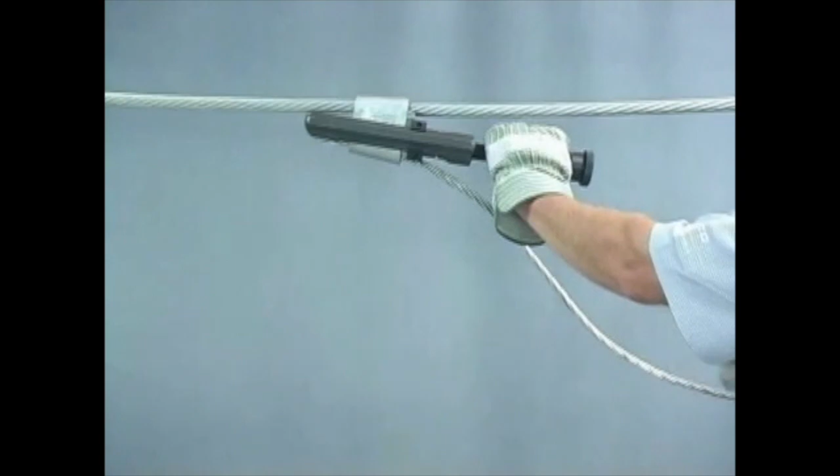I've seen a fair bit of change within the industry, and a lot of younger apprentices and linemen on the job. The one thing I notice with the younger guys is that they're being taught safety first. Not so much like that when I started out.

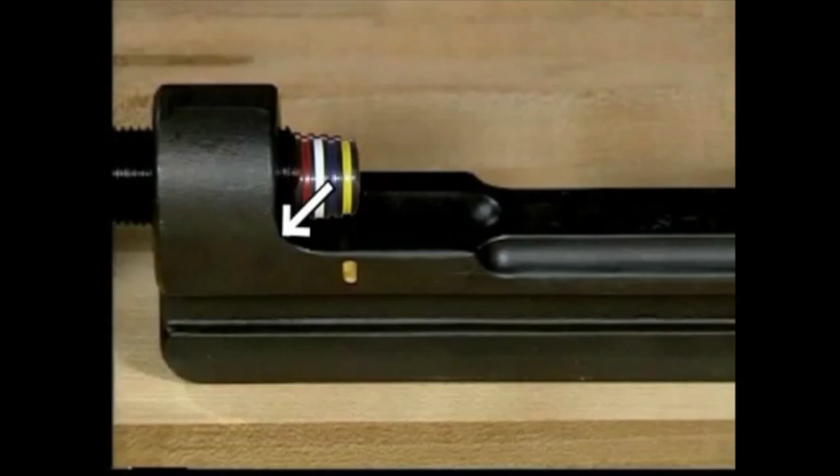I was recently on the job with an apprentice who was using the Ampact gun for the first time. He didn't have a clue, hadn't had any training, and didn't appreciate that he was working with a loaded gun. I stepped in to give him some pointers before he injured himself or other workers around him, thinking, if this was my kid, I'd hope that someone with more experience would do the same.

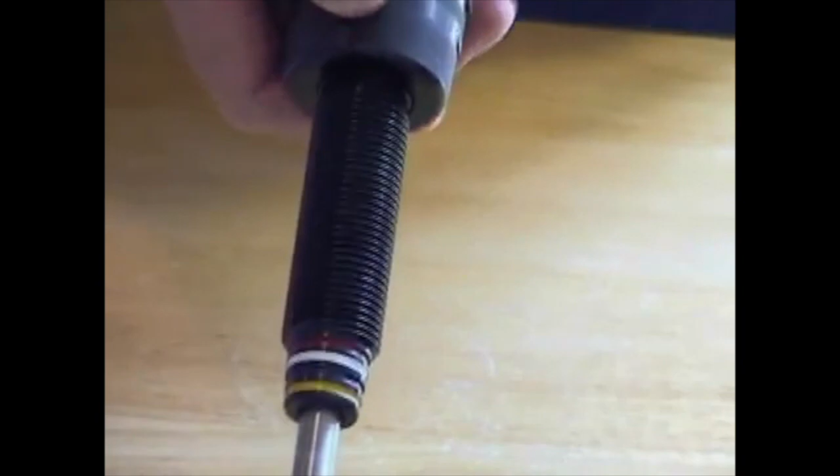I had an Ampact manual in the back of the truck, a little worn, but I figured it'd do the job. It wasn't until I walked him through the steps that I realized not only how much there is to learn, but how many safety concerns there are around this tool.

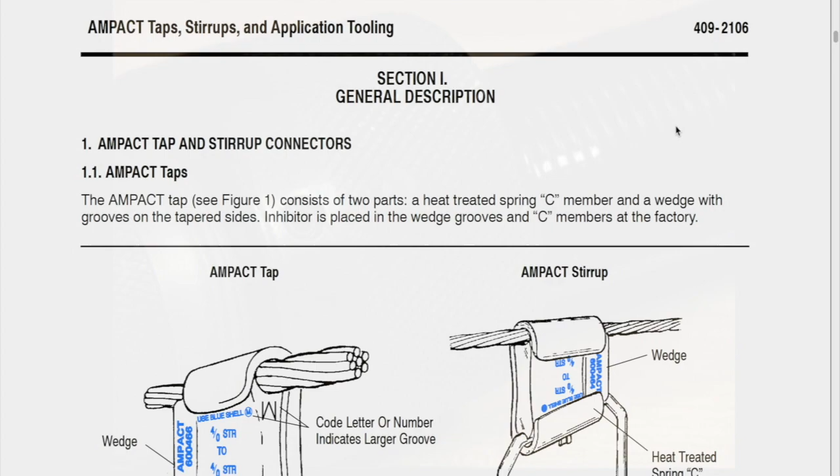Take a look at this manual. There are 42 pages that you absolutely must know to use this tool. I was a bit surprised when I realized how many times the word danger came up. There are 38 instances of the word danger associated with this tool.

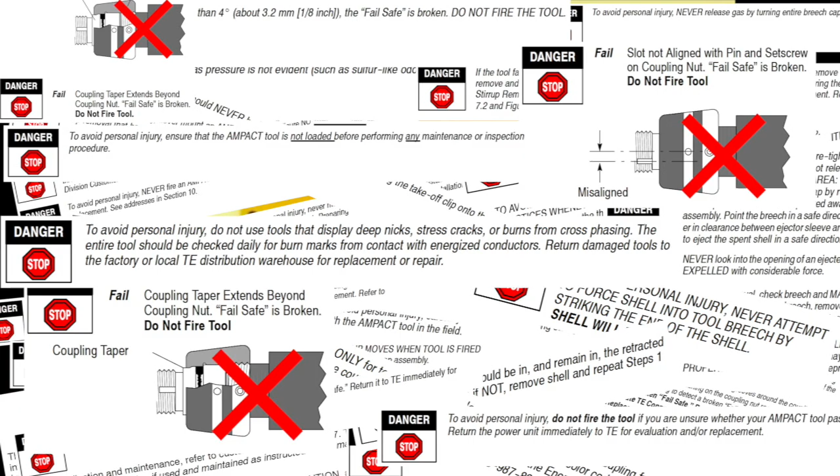Look here. This is the published meaning of the words danger and warning. Danger indicates an immediate hazardous situation which, if not avoided, will result in death or serious injury. Warning indicates a potentially hazardous situation which, if not avoided, could result in death or serious injury.

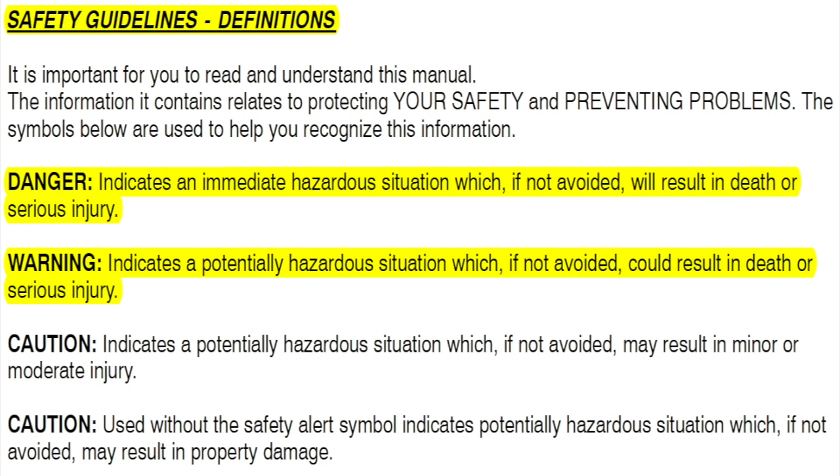Are you kidding me? Why are we still using a tool that right in its manual you're warned at least 28 times that you could lose a limb or be killed? Why, when there are other non-black powder options out there? We're dealing with black powder and the possibility of the breech cap blowing off.

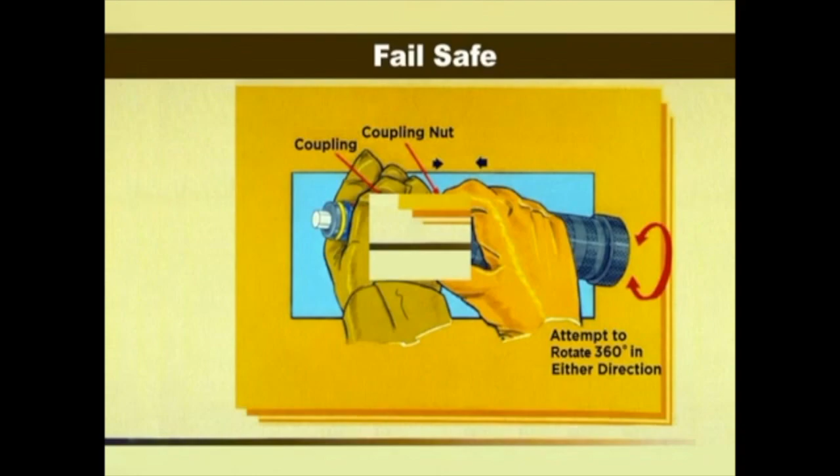By the way, there's a 25% misfire rate with this gun. We all know how much of a pain it is to change out a shell that misfired, especially if you're in tight.

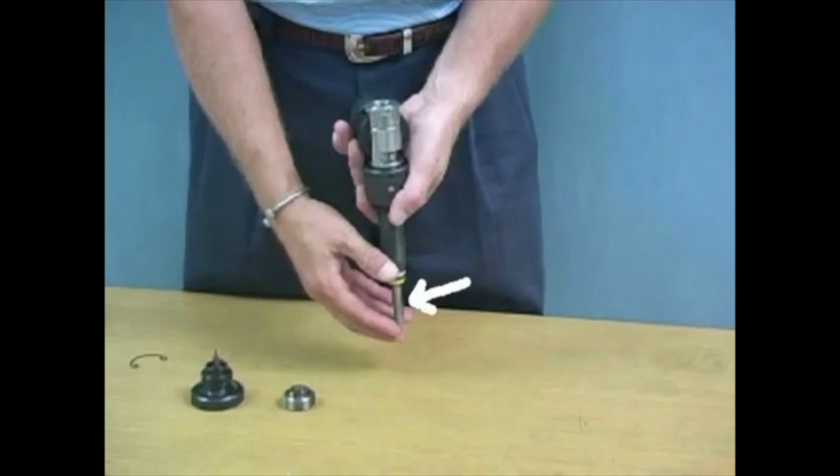There's also the issue of noise and possible hearing loss after years of use. We should be wearing hearing protection every time we fire this tool, as the manual states that up to 99 decibels are generated. OSHA states that 85 decibels is the maximum allowable exposure.

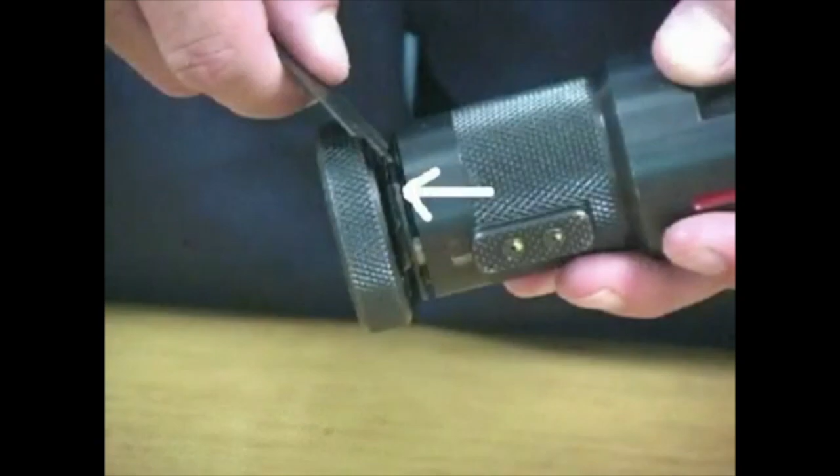Earmuffs always? Really? I've never seen anyone use the muffs when firing, and I don't think that I will, as it can cause other safety issues for us when we're operating the boom and communicating with other guys on our crew. Here's the bit on noise.

Striking the gas release knob with a hammer will cause a noise. There is additional noise generated by the expansion of gases when firing the shell. A typical hammer strike only will cause approximately 90 decibels short duration noise. The addition of the largest yellow shell will cause the noise to be approximately 91 to 99 decibels short duration noise.

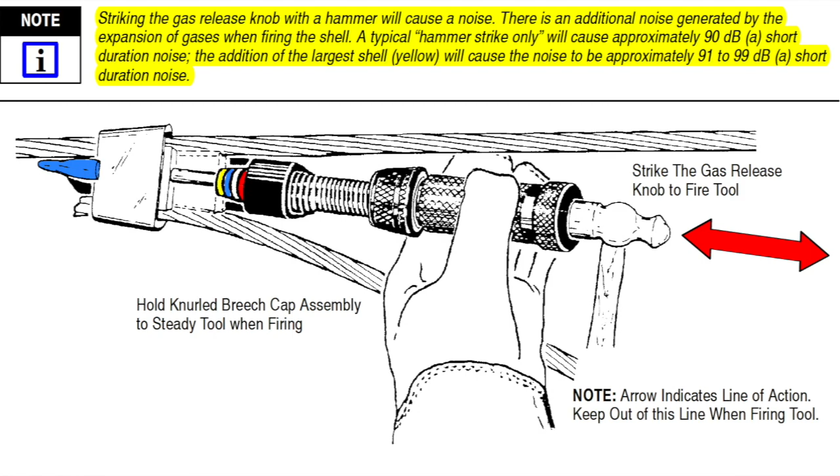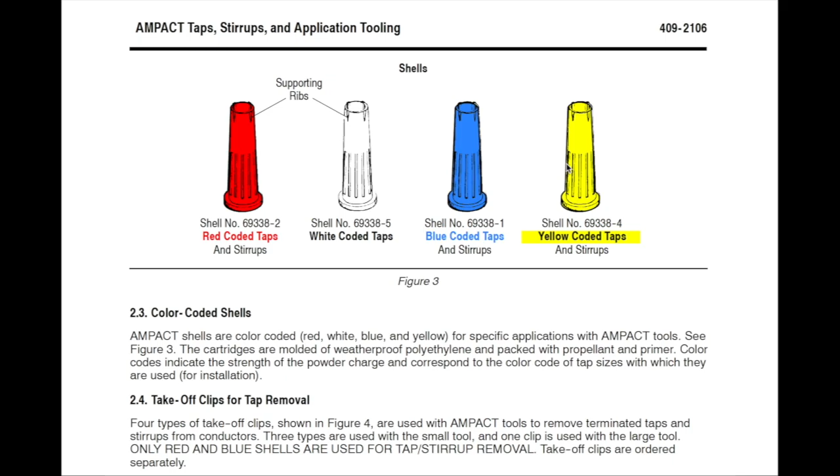Scan through these instructions. To start with, there are 4 different shells: red, white, blue, and yellow. Each color represents a different amount of charge. You need to ensure you use the right shell for the right connector.

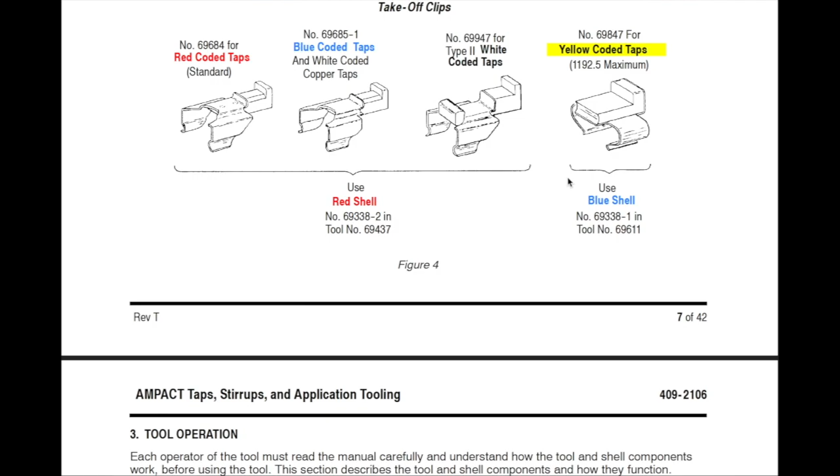There are 4 different removal clips to take off the tap: red, white, blue, and yellow. You must use a different shell to remove the Ampact than you did to install. There are 4 different possible settings on the gun that you have to ensure you achieve before actuating.

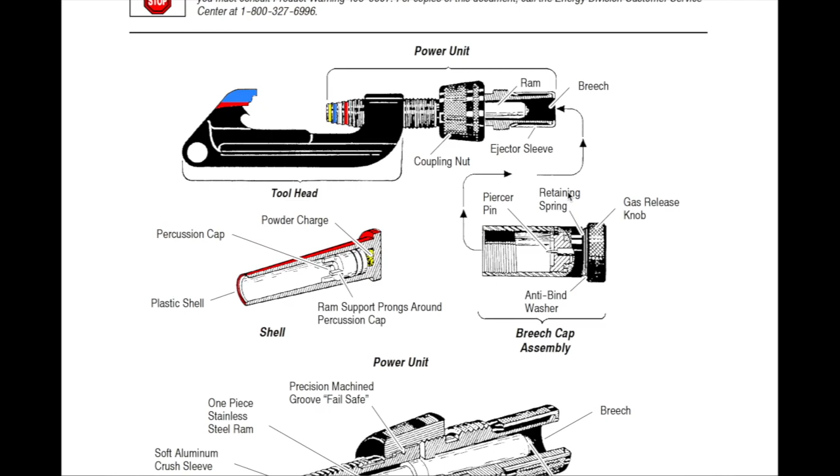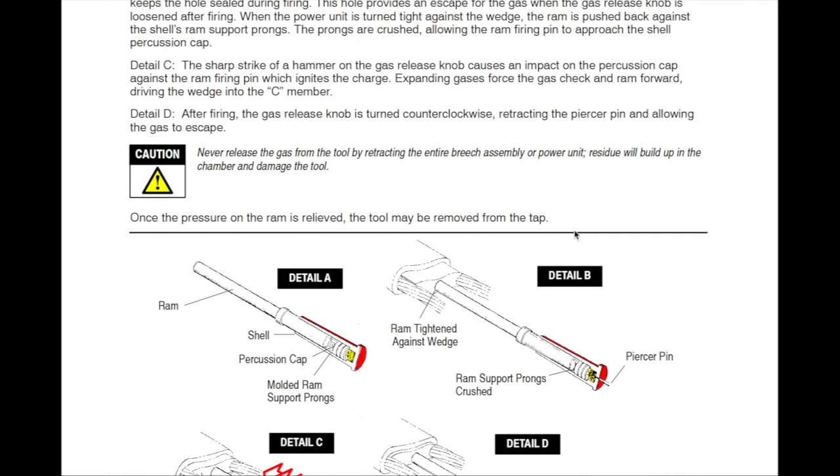The consistency of the connection is dependent on the alignment of the color coding. If not aligned, you could have an improper connection. There are instructions on what to do when the shells jam, how to inspect crush rings, and what to do in ram damage scenarios, defective firing pins, and so on.

I'll put the manual away for now. Check out this video I have running in the background. I've muted the sound. You can find it on YouTube by searching for TE Connectivity Ampact Easy Load Wedge Installation Tool Part 2 of 2.

Check out how complicated this thing is. I won't play the entire video, it's over 10 minutes long.

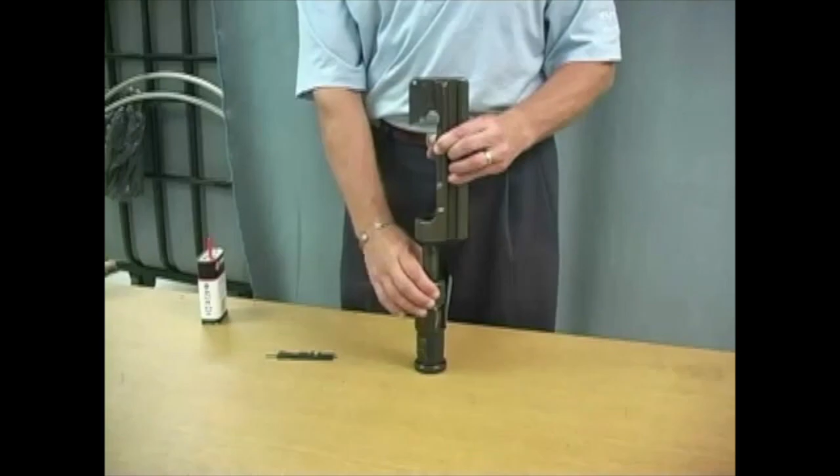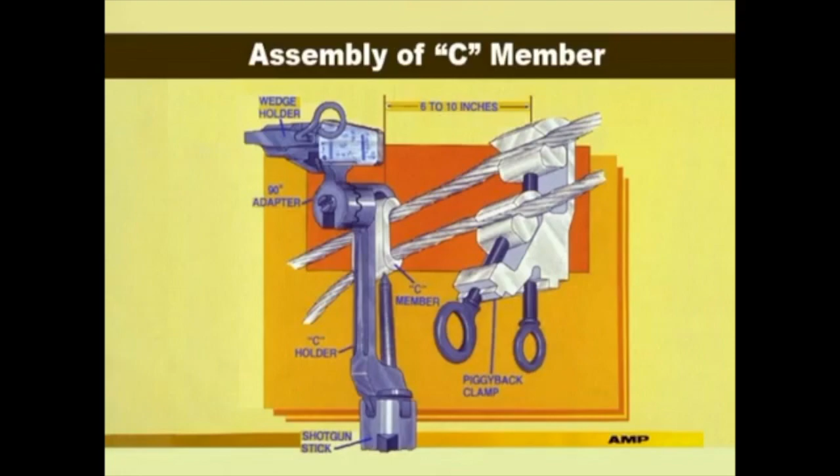To assemble the C-holder, install the 90-degree adapter to the wedge holder and attach it to the C-holder. Slip the C-member into the C-holder and tighten the eye bolt. Place the wide end of the wedge into the wedge holder with the wedge grooves oriented properly in relation to the through and tap wire. Tighten the wedge holder bolt.

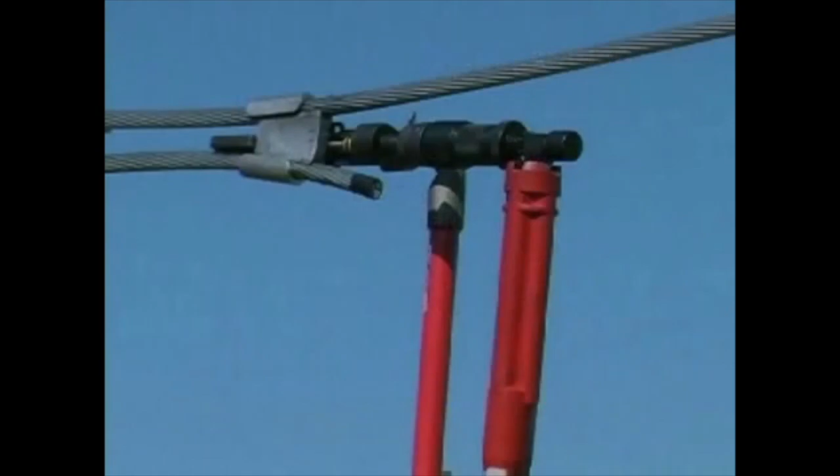So, to go back to the beginning, is there enough training offered to our apprentices on how to properly use this tool? I'm not aware of any formal training or even annual refresher training provided, and certainly no certification, no documentation for liability. Am I liable as a journeyman or foreman for my crew?

The manufacturer states this tool should be inspected daily, but as is the case with a lot of our other equipment and PPE, is there a maintenance program in place? Is it trackable with an audit trail? Who's inspecting these to ensure that they're safe to use?

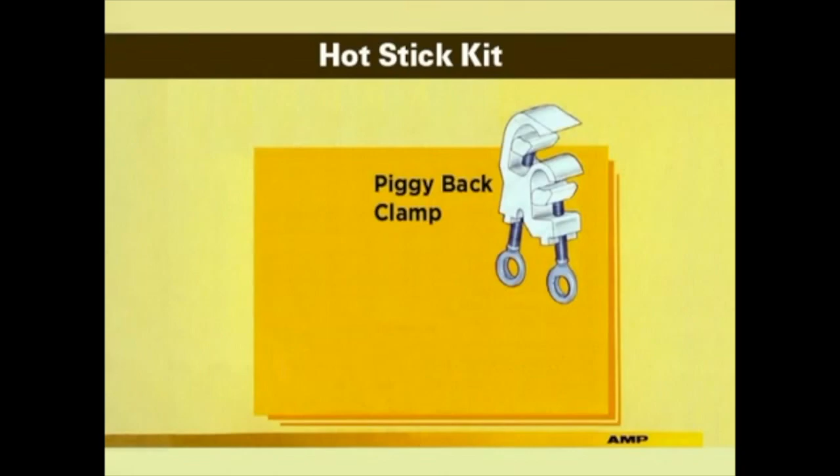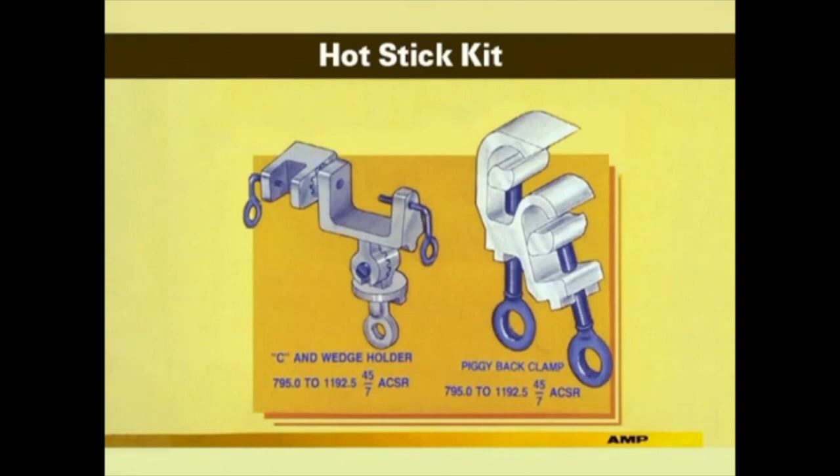What about the shells? Are they stored in explosive fireproof boxes when they're on the truck or in the warehouse? Are the workers in the warehouse handling these black powder charges trained to deal with explosives? I've seen skids of these shells. Boom! There is legislation around black powder storage, and as far as I know, no utilities are following these requirements.

What happens in a fire? Who's liable in this case? What's the due diligence here?

I have to wonder why the industry continues to support gunpowder. This tool came on the market 50 to 60 years ago when there was little focus on worker safety. Do you know that the tool has and continues to remain unchanged from the date it came on the market?

We've been moving away from the Ramset and Hilti pin firing guns and have gone to shields, anchors, and epoxy type pins. So why are we still using a powder actuated tool?

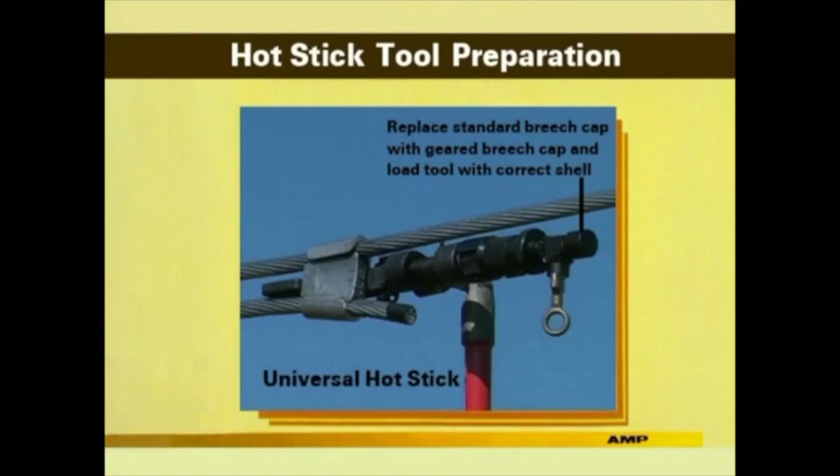I figured in this day and age of PPE for everything, there had to be other options out there. So after searching the internet, I found other connectors that looked safer, easier to use, required little maintenance, and have been used in the air for years. I've read that these connectors have the same or better connection capabilities with faster install on top of it.

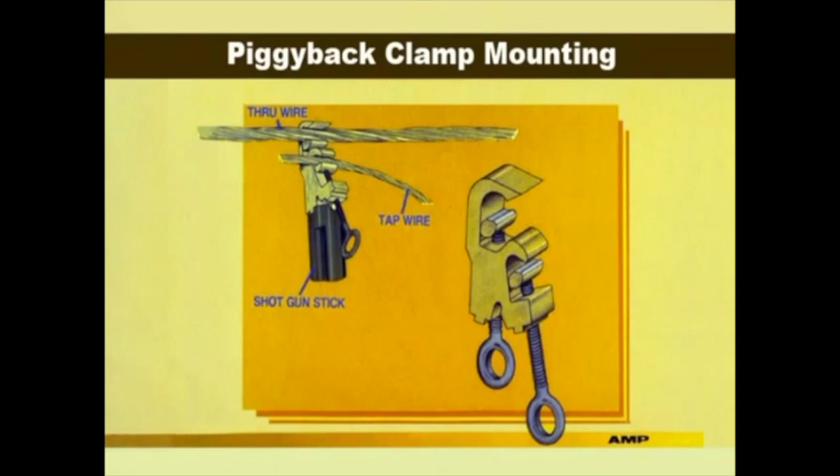I hope this video makes it to the future linemen in this great industry and to the utility safety officers and managers before others experience the hearing issues I have, and people are injured or charges are laid. Do the research. Find a better solution. Thank you for listening.